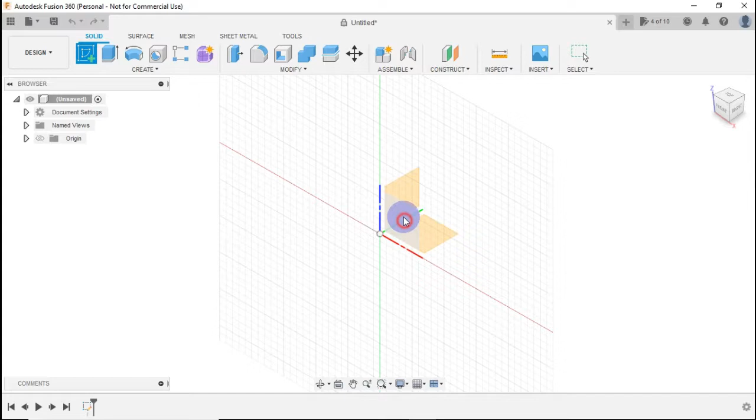Go to Fusion 360. Click Create Sketch. Click this plane. Activate line. Click this point, make 63mm. After that, go to vertical, make 75mm. Go to horizontal, make 63mm again.

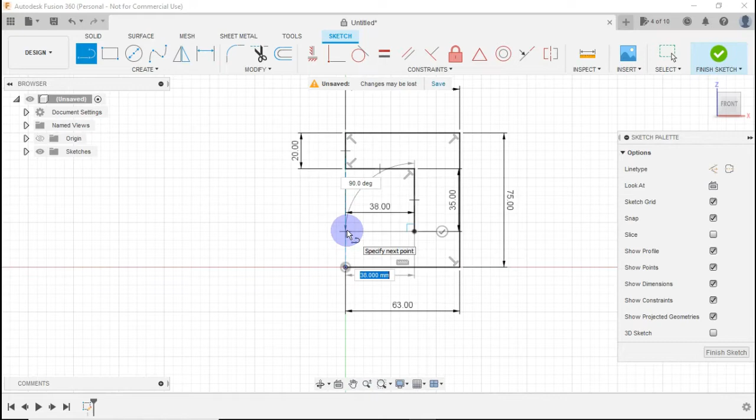Go down, make 20mm. Point right the line, make 38mm. Point down, make 35mm. Point left, make 38mm. Point down and click this point.

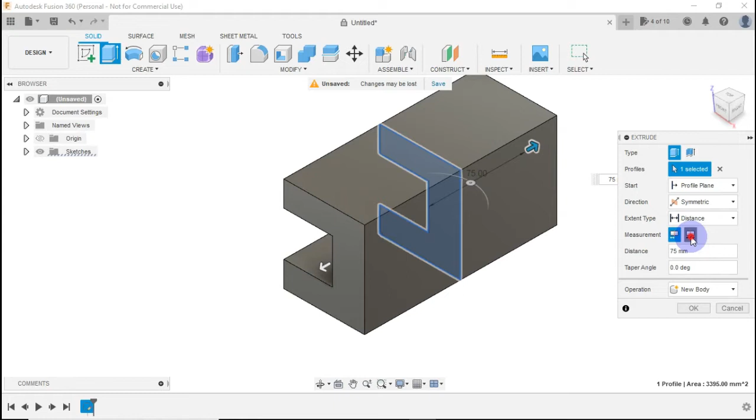Push E in keyboard to activate extrude tool. Choose direction symmetric, with distance 75mm. Choose whole length. OK. See, the part is making.

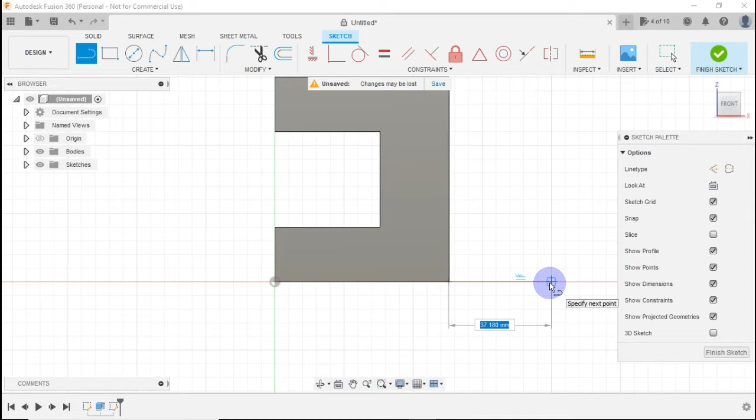Click Create Sketch. Click this plane. Activate line. Click this point and point right the line with length 28mm. Point up the line with length 64mm.

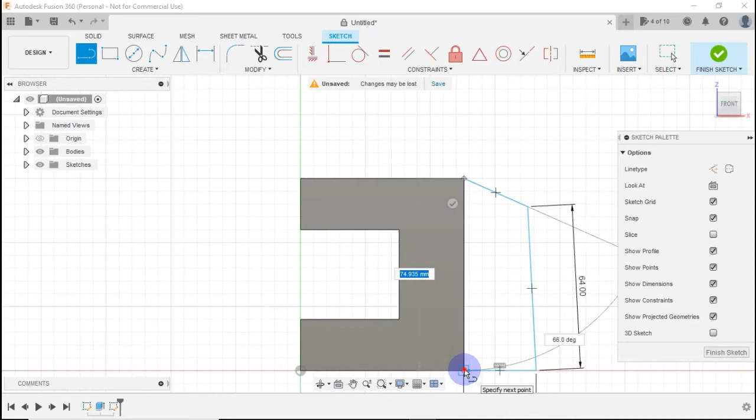After that, click to this point and this point. Make this line vertical. Sorry, not like this - this point connects with this edge.

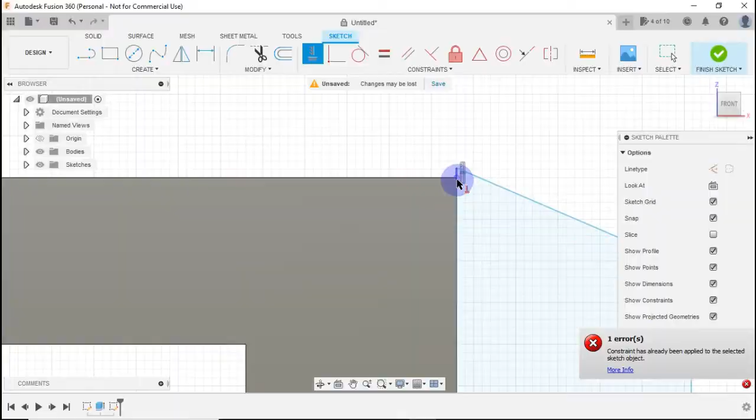Activate line. Click this point to this point. Delete this line and trim this line.

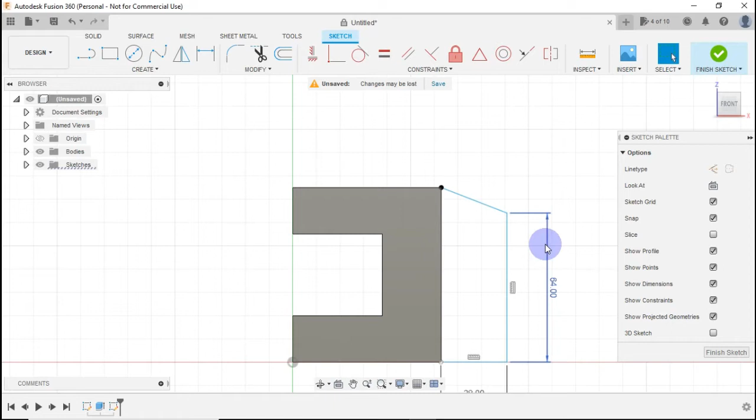Activate line again. Click this point to this point. Push E again. Make direction symmetric with distance 21mm. Measure wall length. Click OK.

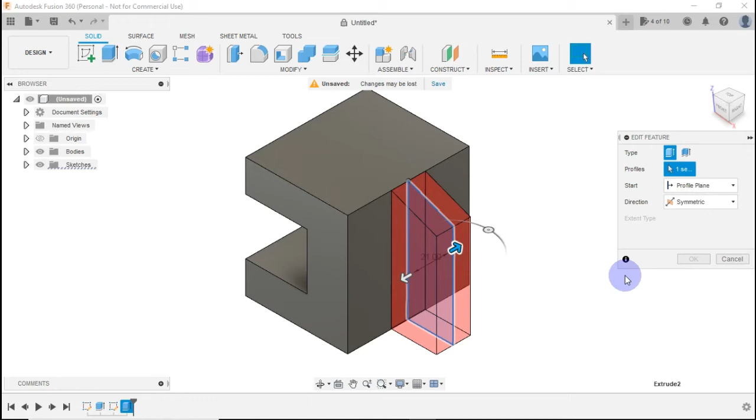Sorry, right click this feature and click edit feature. Make operation join. OK. See, the part is made in.

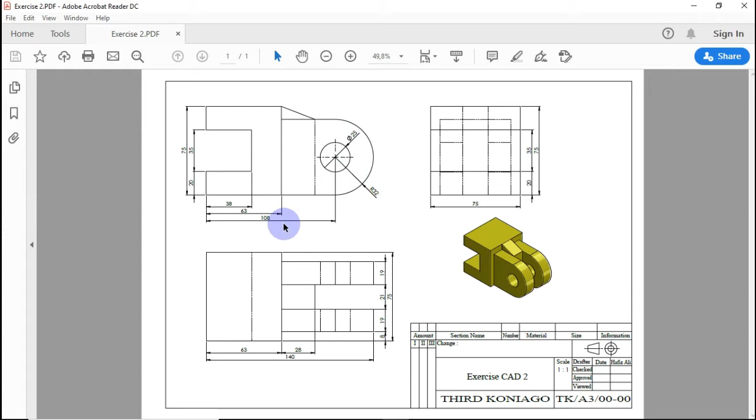And now we make this part with radius 32mm. Click Create Sketch. Click this face. Activate circle. Make diameter of circle 64mm.

Activate line. Click this point to this point. And this circle to this point. Click this point to this point. Make circle and line tangent.

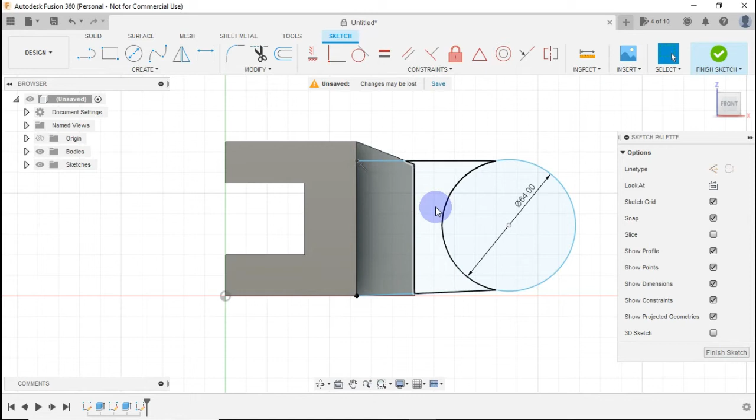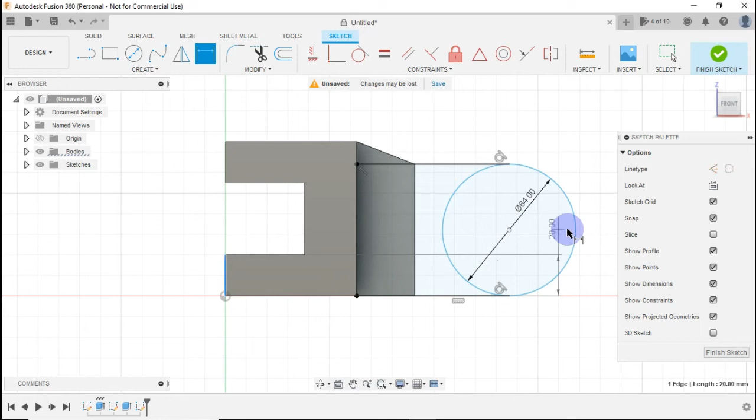And this line horizontal. Activate sketch dimension. Click this edge and this circle, make 108mm.

Activate circle. Click this point. Make diameter of circle 25mm. Activate trim and cut this line, this line and this line.

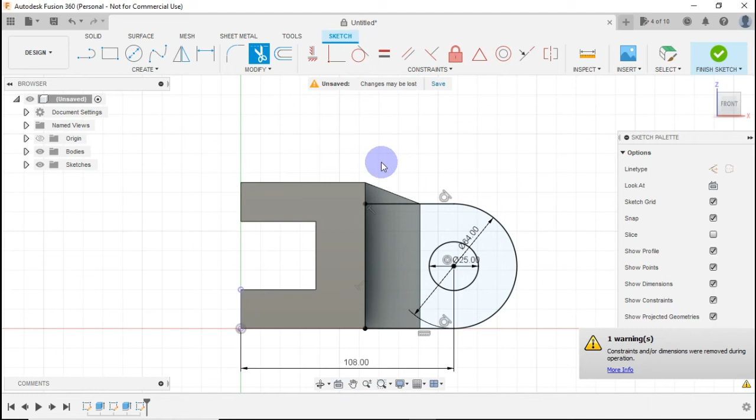After that, activate extrude. Click this face and this face. Make distance 19mm. Okay.

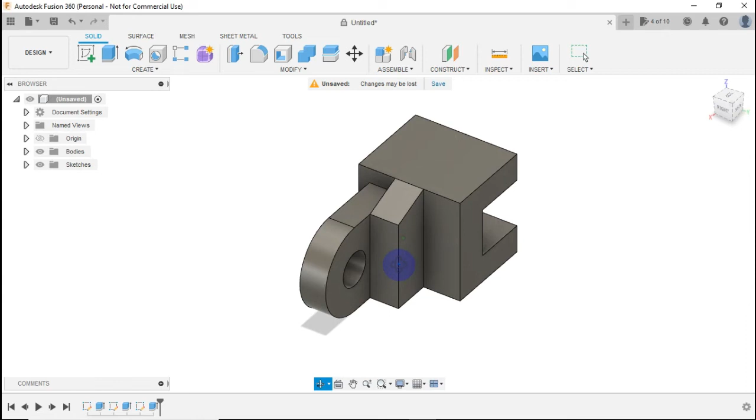Activate mirror. Choose feature for type. Click this object. Click this plane for mirror plane. OK.

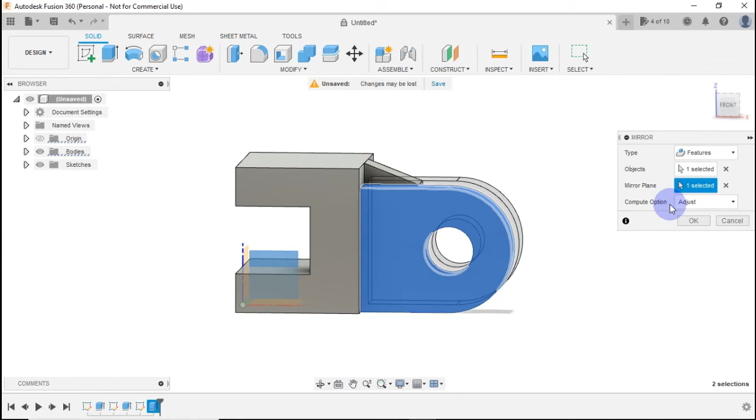See, the part is ready. Now I want to change the color.

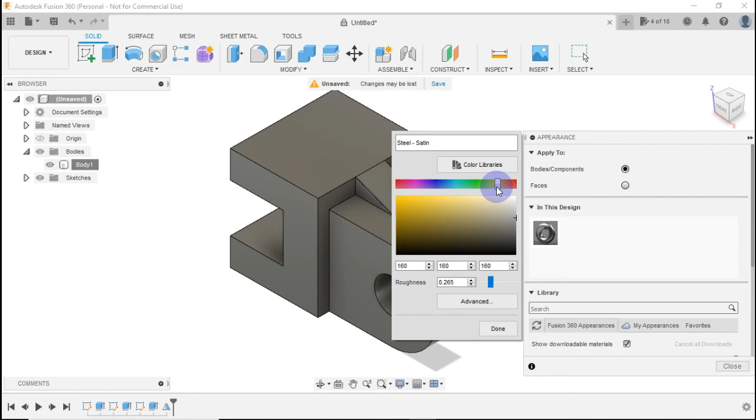Right click this body and click Appearance. Right click this and click Edit. Choose yellow color. Done.

See, the exercise is finished. You can try this exercise at home to improve your skill.